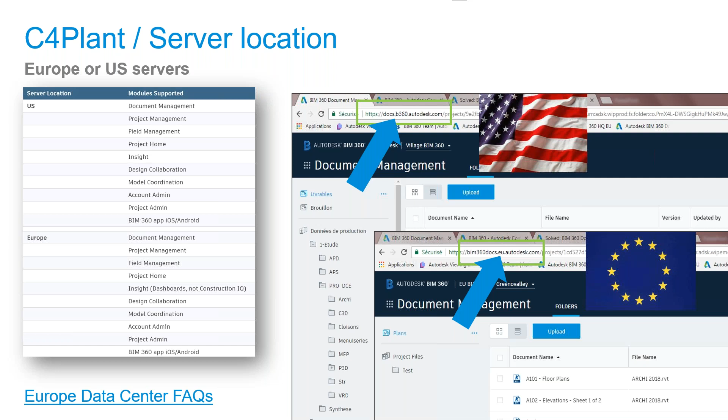Alternatively, of course, we continue using the US ones. And quite honestly, I've had people doing projects right around the world on the US server and have had very little problems. So just be aware of that.

I also wanted to take a beat to touch on the collaboration for Plant 3D access. We've had a lot of questions about this, and I'm also going to publish these slides to the blog in the next couple of days, hopefully. But just touch on it. So talking about single user subscriber licenses.

If you're a subscriber and you're trying to use collaboration for Plant, there's a few gates you need to get through, kind of that Swiss cheese effect. And if they don't all line up, it can be a little bit difficult.

First one, of course, is needing to get access or be licensed for the Plant 3D application. In the subscriber world, that is done through Autodesk account. When you launch the project, the product will ask you to sign in or identify your product, depending on how you've bought it. Autodesk account will validate that you have the correct license to use Plant 3D, allowing you to do that.

It will not actually give you access to the collaboration feature, even though it's installed with the product. When you click on that, it will tell you you may not have the access rights.

To get access to the collaboration feature, you also need BIM 360 design. When you do that, it will show up in Autodesk account, and in the subscriber world it checks that through your profile. That will then give you access to the BIM 360 suite of tools that are assigned under design, and there are a few there as well.

You can use Desktop Connector to access the project, and it gives you access to the doc space as well. But it's worth noting that Plant 3D is accessing a folder inside your BIM 360 docs folder structure. So docs is entitled under BIM 360 design for the purpose of collaboration. You need to have permissions to see and download the files in that folder.

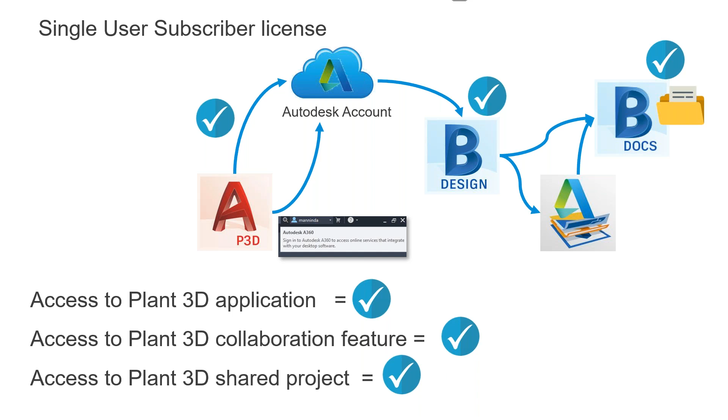In the multi-user environment, it is often slightly different, and we're talking here about using server-based licensing. It uses a network license server to issue licenses to users. The real difference is this first step where we log into the WAN, LAN, or VPN for our enterprise, and when we start Plant 3D, the first time you launch it, it gets licensed, or it's done as part of the deployment, to the license server that you're required to access.

That gives you the ability to use the application. And then when you try to use the collaboration feature, it's going to want to go out and validate that with Autodesk account. So there's two separate systems there: the corporate license and the Autodesk account, which does go back to your corporate license, but it is entitled through your Autodesk profile.

Now, you may not have done it to start with, but at this point, you'll be asked to sign in. Again, top right-hand corner of the product, you'll see a sign into Autodesk services.

Once you've done that, and assuming you've got BIM 360 design entitled to you by someone, you can utilize that entitlement to access BIM 360 design. And finally, as long as you've got access to the project folder so Plant 3D can find that project XML, you will have access to your collaboration projects and can work without any problems.

What is better, Revit or Plant 3D? In all honesty, there's a bit of a hook there. Neither is better. They're certainly better in their own ways and for certain things, as in they both have strengths, and they both are better in some use cases, but neither is better than each other. They both have their place in the world. It really depends on where you sit and your perspective of those use cases.

So we thought we'd take a look at it in a direct comparison structure first. This is a Plant community meetup, so I know you're all very familiar with Plant 3D, but we thought we'd set the stage a little bit and look at what we've called the Plant 3D spine, where we start at the top left-hand corner with the specs and catalogs editor, where we can edit our components and build out our specs, which is ultimately the backbone of the Plant 3D environment being spec-driven. That then drives value through to the P&ID and the Plant 3D space by using those specs.

Of course, you don't need to use them for P&IDs, but it does increase the value there. And there's plenty of other tools that go on to add value and speed and quality and efficiency. So we can use those specs in P&ID and in the 3D modeling environment.

Of course, where some huge value comes into the P&ID environment is generating reports, and in fact that's generally - you can see the two blue arrows going from the modeling environment and the P&IDs back to the reporting section - taking reporting from spreadsheets and notes and books on the shelf, as I vaguely remember keeping ISO drawing numbers in logs, down to single-click buttons that can be updated at the drop of a hat, and they're 100% accurate with what's in the system. It just eliminates human error and makes things a lot faster. Huge savings there, as well as accuracy.

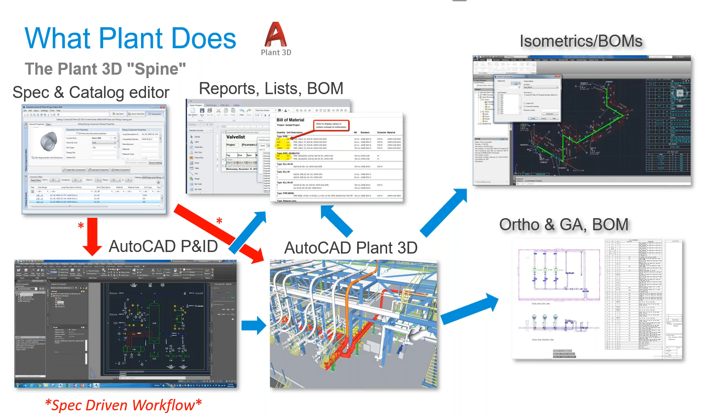In a lot of similar ways, when we take a pause over to the Revit side, we look at the same sort of structure. Revit is still a file-based database - a file is a database, effectively. And we start at the top right-hand side with the Revit master model. You can get, again, reporting coming out to the left-hand side of that. It does use parametric families where we're using objects in Plant 3D. We're using families here, so there's a lot of similarities there, but there's pros and cons to both styles as well.

The 2021 version of Revit has a generative design feature, allowing you to use Dynamo and other features to analyze the design, to test various iterations - a significant thing, a whole class on that, so we can't spend too much time there, but it is being built out and will continue to be built out. And the last point on the left addresses three main areas. So when we're talking about buildings or structures, it even goes beyond just buildings.

So Revit is not just for buildings; it goes into a lot of things, but its history is founded in building design. We talk about three main areas: the architectural model, which is the physical structure, the building itself, the fascias, the walls, the fittings. Then we also talk about the structural model, which can be just a structure. You could build a shed with it.

I'm sure people do. But it's the structural design, the members, similar to what we would do in Plant 3D with the structural module, only significantly more detailed. And there's definitely a parallel there to the Advance Steel, which we'll touch on in a bit.

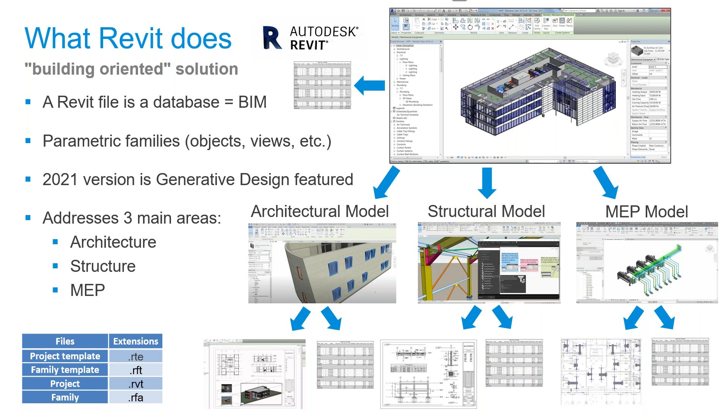Just to look at Revit in the Plant 3D project environment, where Revit will particularly help is where Revit can help a plant project. Plant doesn't do structures very well. It doesn't do buildings very well. Sure, we can do buildings in there, but it's not what Plant's designed to do. Plant is designed to get that piping stuff done as quickly and as efficiently as possible, and at fabrication accurately.

So Revit can come in and be really helpful with the building elements and the overall structures that complement. And the top image there, of course, is a plant that is inside a shed or a building, is a classic example. It might be a great way to collaborate with the team rather than trying to revert to some less efficient ways to do that structure. And there are obviously workflows between the two with structures too.

Now, concrete design is where Revit is really good. It also has the formwork and the rebar built in, where that gets fully detailed and comes out in drawings and fabrication details. Honestly, I haven't done much with that, and I don't really understand it, but I understand it is really powerful and interesting, and certainly worth keeping an eye on.

Sorry, I just thought I saw a question come through. Not just yet, so that's good. I'm just going to delete that one.

Leave that one there. And of course, talked about before about cable trays, your HVAC systems and general ducting, which is also a powerhouse of the Revit side. We don't tend to do that too much in Plant 3D, although of course you can. It's just where Revit really comes into its own.

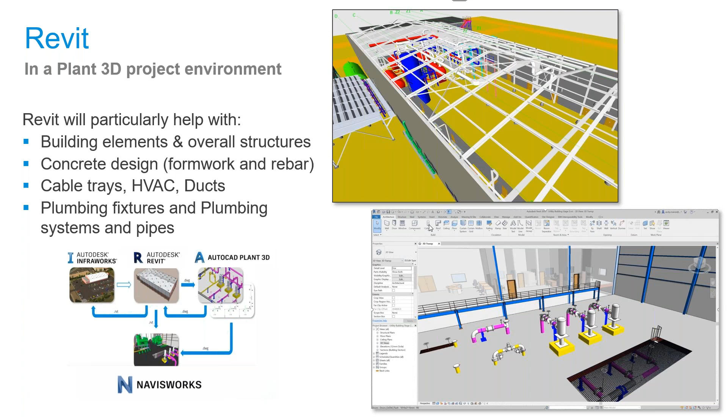We can do highly accurate, highly complicated, if you want to go that path, clash detection and a whole bunch of things. But I think I might be getting a bit ahead of myself. So it all does become integrated together.

Now, we just thought we'd take a quick pause. There are products that we have that work well with Revit and with Plant 3D, and reality capture is a big part of that, and we tend to see a lot of people starting to embrace this more. The prices in the last 10 years of getting a scan done has come down so far. It's becoming really accessible, almost to the domestic level, and you can do it well. In fact, it is the domestic level, because you can do it with your iPhone these days, or whatever phone or camera you've got, and use the photo to mesh, although that's not going to give you scale. But if you've got a tape measure, you can certainly fix that as well.

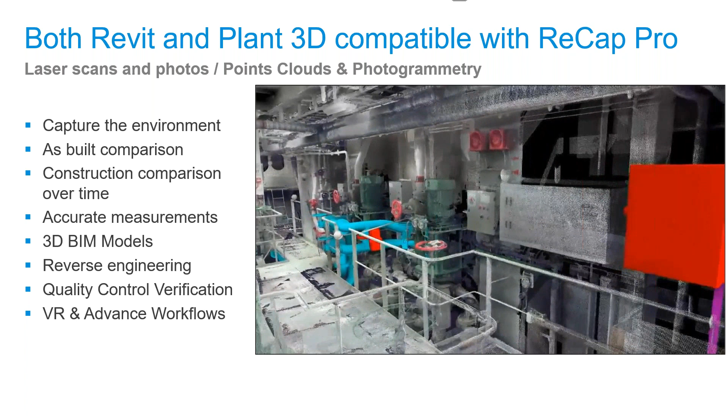This is a video, I'm going to see how that plays and we'll see what happens. So this is just a little video. With the world these days and the scanners, you can get some now that are so cheap that they're so easy to use. They're literally a single push of a button. You can run down to a site and grab all this sort of scanning.

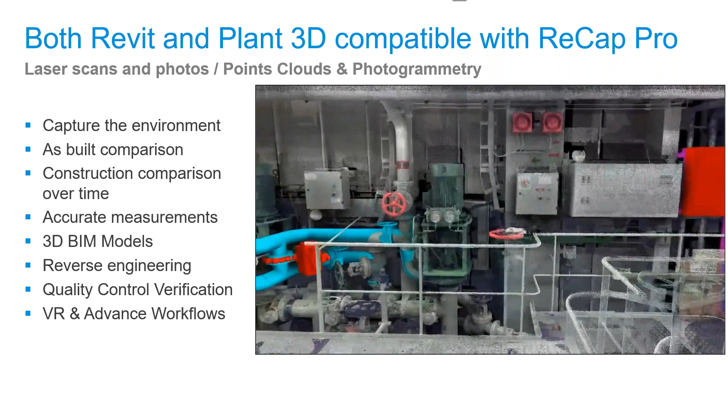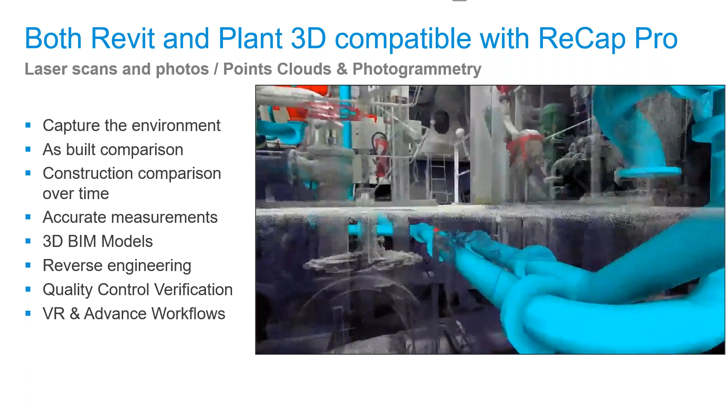The huge advantage, of course, is to get this level of detail that you're seeing on the screen would be just weeks and weeks of tape measure and sketching to be able to get, and you still never get exactly the right measurement. Each one of those dots you're seeing is a laser measurement, which is just indispensable in the design environment once you're used to it.

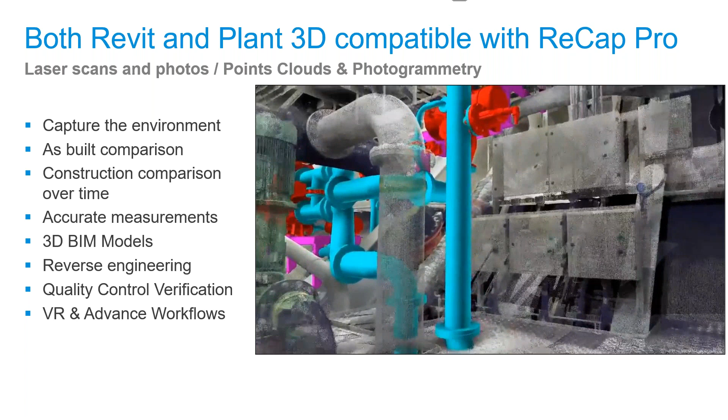What we're showing is it doesn't matter whether it's plant piping or Revit piping, it could be the same thing, but it gives you the ability to route that piping in with the existing environment in place. And that's looking like a ship, actually. Just look at that side there. So really, really powerful tool.

For reverse engineering, for building out your 3D models, getting that accurate measurement exactly where you need it. And I've certainly seen that become highly valuable to a number of our clients. And like I said, with the cost of everything coming down, it becomes one of those things that just becomes day-to-day.

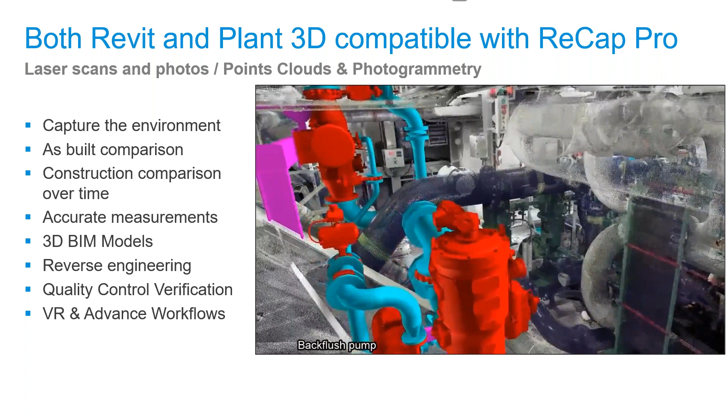Experiences. How much left is on that? I might pause that there. I'm not seeing any questions on reality capture coming through, so I will keep moving on.

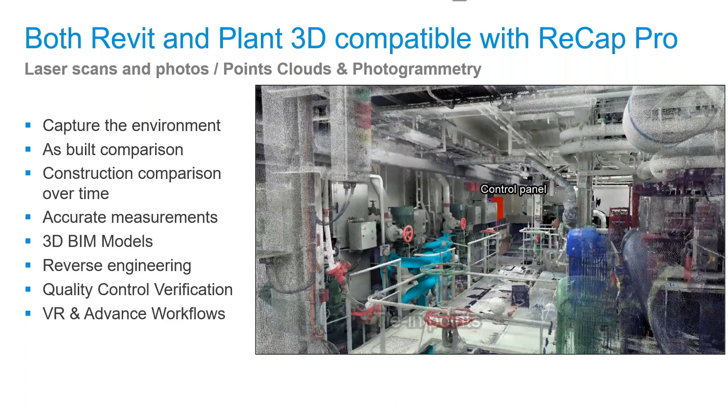So the next thing we want to look at is, so when you're talking about both products and comparing the features as well, both are now also storable on BIM 360 docs, which sort of changes the dynamic a little bit.

As you're probably aware, 2018 to 2020, Plant 3D was in the BIM 360 Teams environment, and that was the same as Revit for a period of time, but none of our other products were in there. Now that we're in 2021, if you're using that, you can access the collaboration feature for Plant in the Docs environment, which means that we are now working in the same project or same cloud storage space as our Civil 3D colleagues, our Revit colleagues.

We can also share any other DWG up there with specific knowledge on the workflows. And there are also workflows to leverage things like the BIM 360 coordination space to be able to do automated clash detection and issue management. And Docs adds in a whole bunch of advanced features, the absolute best of which is the permissions, allowing you to control whoever has access to what.

But we covered a lot of that last month, so I won't go over it too much. Just worth noting here that Revit, when it started doing a collaboration feature or the work sharing feature, did start in the BIM 360 Teams environment, and that is accessible or still currently usable all the way up to Revit 2018.3.

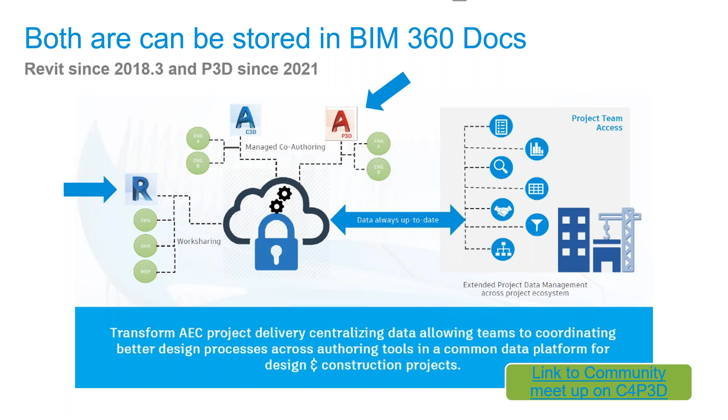And I will show you the page in a bit. The other side of that is to just highlight the point that Revit and Plant 3D are not two separate products that are completely disparate. They do work together, and one of the great examples of that is the P&ID connector for Revit.

If you haven't heard about this before, it is basically a P&ID drawn in Plant 3D that is made accessible to the 3D modeling side of Revit MEP.

The way that basically works is it's a collaboration project for Plant, and that can be, again, version dependent, whether you're in BIM 360 Teams or BIM 360 Docs. You share that project to the cloud, you detail your P&IDs as you normally would in Plant 3D, and a Revit designer, who is, if you're going to do the piping in Revit, can access that P&ID.

In very, very simplistic terms, selecting the drawing from the browser. Once that opens, you can select the pipeline and then individually select the pipe or a valve and drop that into your Revit model, taking some of the properties with it.

Now, there is a bit of a caveat there that for that to all function, there is a mapping, similar to why we map P&IDs into the 3D environment, but it's obviously less intuitive because it's a completely different product. So there's a bunch of mapping that needs to happen to get that to function.

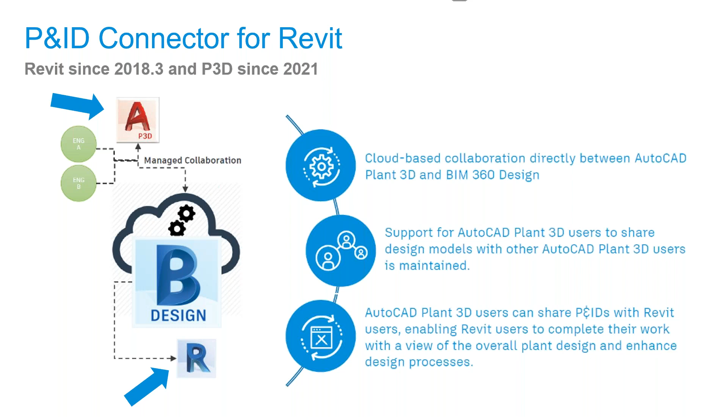So that brings us to what tool is it that you want to use? What tool is the best in what circumstance? So let's just take a beat from something we were discussing last year internally, and now I've had permission to share this slide from some internal teams.

What we're looking at here is the types of projects that are used across the industries, typically serviced by Revit MEP - that's the ducting, the piping side of it, mechanical tools - and in the top right-hand corner you're seeing the Plant 3D industry. Now, looking at those, it might be a bit hard to read on your screen, but the bottom right-hand corner are the colors of the dots we're showing. So the dots are project types, and the colors indicate what kind of piping systems they're talking about.

So let's start at the bottom left corner. We're looking at educational institutions, hospitals, commercial buildings, industrial facilities that are non-process type things, civil infrastructure there in the middle. And as you go across into the Plant 3D side, you can see there's deliberately an overlap in the middle.

And what we're looking at is these medium pressure processes, the green ones being low pressure and the red being typically high pressure, as a generalization.

So the blue ones, as we go through, the medium pressure, we're again looking at wastewater systems, water and wastewater systems, potentially semiconductors, food and beverage facilities, industrial facilities again, but looking at the process side of that, marine, so talking about shipbuilding and ship design, moving further across pharmaceuticals and biotech, mining and minerals processing, and pulp and paper, all in that sort of medium pressure space, because they're not dealing with really high, really hazardous materials.

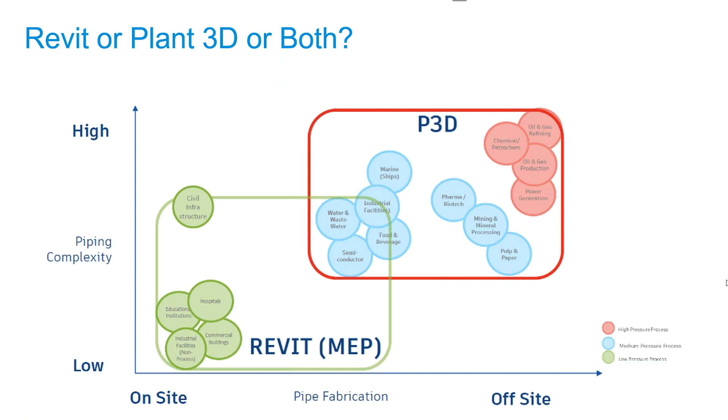So just keep in mind, the line through the middle for me is the field fit or not field fit stuff, but don't take this as a rule. It is just something we're looking at as an organization to try and look at where we're developing and where the development of things might go in the future. No promises, I'm not suggesting it's definitely going away. It's just how we're bucketing things for the time being. Subject to change as always.

So, pros and cons of each, why they add value. For us, when we're talking about this, if you come to me and say, I want to know whether I should be using Revit or Plant, I want to talk to you about which one's going to give you the best value. They're both Autodesk products. For me, it's about what's going to help you succeed in your business, in your project, and which one is going to do that the best way.

So let's look at the Plant side of things. Again, I know you're very much involved in these already, and you don't need to labour the point. So we're going to put a couple of things in here just to offset the Revit side for those who are a little bit less familiar.

This is where Plant's really going to add value. Obviously there's all sorts of things in here we haven't mentioned, dozens and dozens of features and functionality, but at a top level, the first thing that comes to mind is spec-driven design. Revit's not doing spec-driven, it's very simple. We've also got the P&IDs in there as a tool. Both can do them, but that spec-driven validation and intelligence that comes into that P&ID and the general spec-driven design is where you see huge value coming out of the Plant 3D environment.

I've also called it quick, intelligent P&ID drafting. We say that because it is generally very quick, using those smarts and intelligent design tools to make everything a little more efficient. Industry standard symbol libraries come with it, and of course you can build your own - it's the fastest one I've seen to create custom symbols. P&ID validation tools add on top to make sure things are correct, simple things like the shaders, or painters rather. And P&IDs can be used to support Revit pipe modeling, so it's not just standalone, it's adding value to the project.

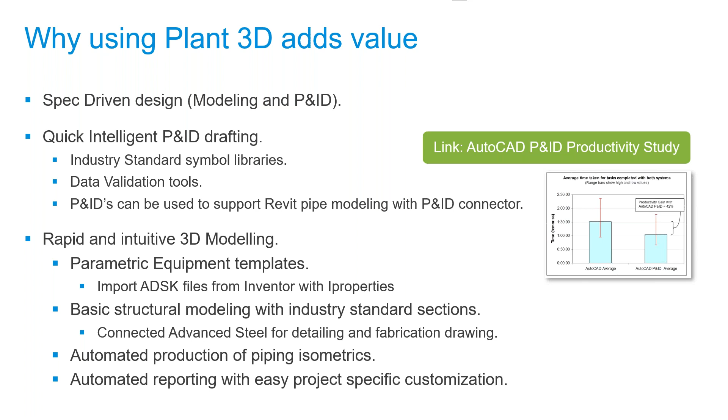Yes, P&ID connector is in Revit. Let me come back to that because I think we're going to touch on it in a minute.

Okay, so looking at Revit, why it adds value. It's considered an integrated parametric BIM solution with computational and generative design tools - that's a mouthful, a very wordy slide. We can use Dynamo Player, our tool for scripting using a window or block-based programmatic tool. That is now being able to leverage that coupled with Revit and Dynamo to do generative design in the latest version, allowing them to iterate, test out multiple versions, and see which ones meet the requirements best with a generative design function.

It's minimizing the time-consuming tasks during design detailing analysis. There's some really interesting features we'll touch on the analysis side. Analysis features for sustainable design codes for MEP and structure, including parametric content for architecture and structural MEP, and customizable embedded macros. We will come back to the analysis thing in a couple of slides. I want to focus on that because a lot of people don't know about it.

And the BIM 360 platform interoperability. If you're using BIM 360 design with Revit, there is a whole back end to the BIM 360 design feature, or module, that Revit leverages or is built out for, with regards to publishing and sharing of files at various stages into the BIM 360 project. If you're interested in that, please reach out to us. There is a whole suite of tools and accelerators we can talk about to share with you.

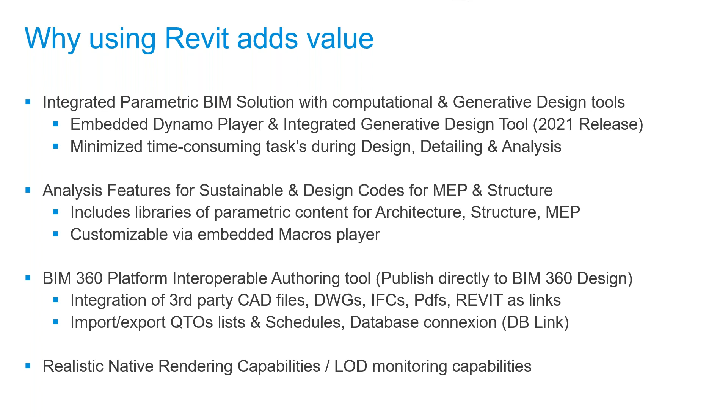Certainly, it's a comprehensive and complicated module to meet the needs of a very large industry. And of course, we can do realistic native rendering capabilities within the Revit environment and level of detail monitoring as well. That can also leverage cloud services, and there's a bunch of things we can do there within the Revit side. A lot going on there.

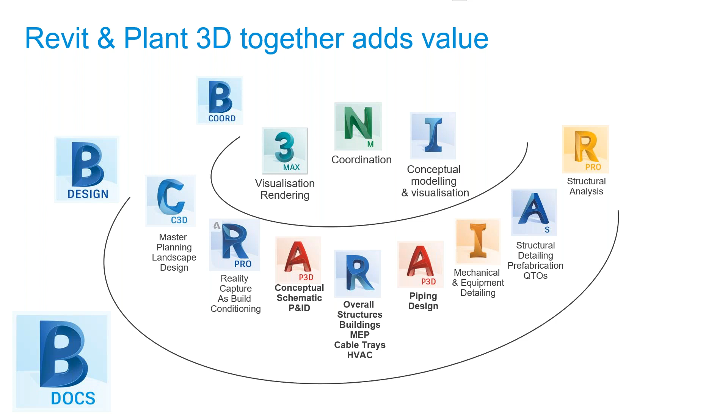So the logical next step, of course, is just having a look at - so we've talked about two products independently working on projects. I've referred to it numerous times. They are not necessarily independent and they can work together. So we just did a quick brainstorm and had a look at, if you were doing a fully comprehensive project, what tools you might use for various parts of the project.

Really straightforward, in some ways because of the simplicity of it - you might just do a conceptual design layout in Revit, and then export that out for the buildings or the structures. You might even import a Plant 3D bit of piping if you just want to do it really quickly, and you can export or import that into InfraWorks for a visualization to give your tender or early stage designs some real meat, some real visualization capability.

Of course, in a plant design, the next step is the P&IDs. Obviously, in the ideal environment, they would be finished before the piping starts, but that's never the practical reality. So we talk about that has to be in Plant 3D, in my mind at least, and you can do them in Revit, but for value, you want to use Plant 3D.

Equipment detailing, tanks and pumps - while we can put them in Plant 3D, I would encourage you to use those as placeholders. There's certainly, if you're going to do details of those, you actually want fabrication drawings for a pump or a tank. Then Inventor's the tool for that, and Inventor and Fusion 360 to some degree, to do all your equipment modeling. That can then export an ADSK file, which can be re-imported into Plant 3D with all the intelligence, connecting the two workflows. In the same way, you can do structural in Plant 3D, and it's often a great way to start it - just lay out some pipes and sections so you can do your piping in context.

Revit MEP, I just wanted to show you this. There's some interesting features in there around the analytics side. The MEP fabrication extension integration, that's a lot of words, allows you to do a bunch of bits and pieces with Revit on the ducting side and do all that MEP bits and pieces.

The one that interests me quite personally is the pipe flow units. So you can see on the right-hand side, there's some basic plumbing done in the Revit model, and with some relatively basic inputs, the software can run some analytics, giving you pressures and flows and some basic data on that piping, which is quite interesting. Something I think would be awesome to have in Plant 3D, but not there today. So that's where it comes into its own.

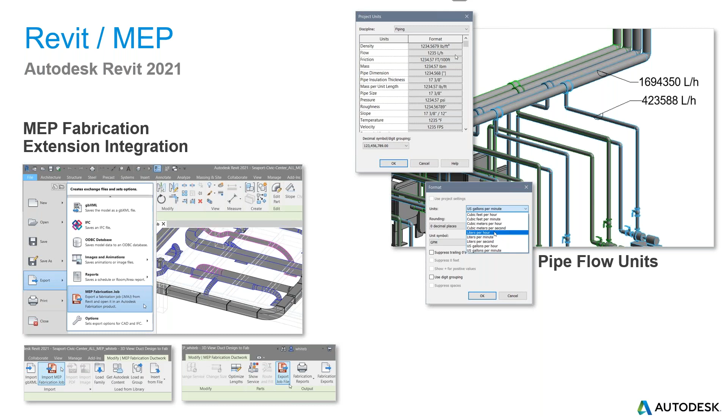We talked before about systems analysis or the generative design side. This was sort of the start to that, looking at the MEP systems analysis. You can do a whole bunch of work here, creating analytical geometry from the models, validate your models, and then review the analysis of the flows and the ducts and make sure everything works. Looking at your energy consumption, you can do solar analysis. There's a lot you can do here, depending how far you want to push it.

And extend that into the equipment zone and plant loop types as well. So there's quite a lot of detail there. A big link across the bottom if you're after that.

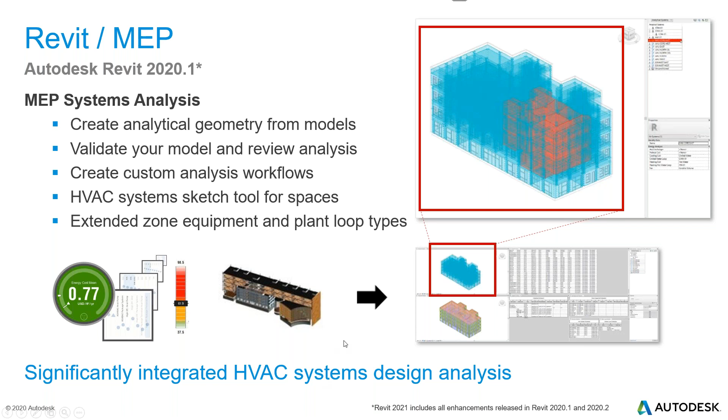Click to go to next. And so there was a question in the Q&A panel: is it the P&ID connector in Revit? So this is the slide I was waiting for to answer that. Yes, it absolutely is, it is in Revit. I couldn't tell you exactly which versions it came and left from, it has changed. I think it's 2016 to 2018.3 is the Team ones, I think it works for. Certainly it is in Revit 2021, and that connects to your Plant 3D 2021 projects in BIM 360 docs.

So just reading that slide out loud, it tells me that the P&ID modeler is now available in BIM 360 docs, and I'd suggest that's with 2021 because the plant projects are now there, and it replaces the functionality we have with Team. So there's that dual connection, and it's dependent on where your plant project is shared, and you need to make sure the right version of Revit is being used.

The way it works is very simple. When you're in Revit, there's a tool in the ribbon somewhere - you click on it and get this open dialog at the top, where you pick the plant project you want to connect to, and then you select from the new panel that opens up. You can see on the right side of the window the line and the P&ID you're interested in. Clicking on that opens it up, you've got P1005 there, and when you click on that, it expands all these.

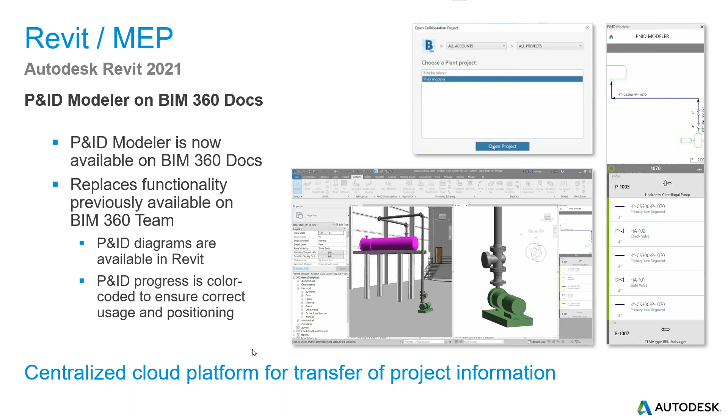So Navisworks adds value as well. Don't forget we've got all these tools trying to build out a holistic project for you, and Navisworks is one of those. Going into Navisworks still has advantages over BIM360 coordination. While coordination is a great space, really powerful, it still doesn't do certain things - you still can't do a quantity takeoff in BIM360 coordination. While you can do clash detection, it's all automated, so there's limited functionality if you can't manipulate it. If you want to manipulate it to change the accuracy or do some roughing clashes, then you can do them much more easily in Navisworks.

You can implement 5D visualization, which is scheduling of construction using Timeliner. You get your construction schedule, bring that in from Excel or whatever format it's coming from, or project management, and schedule the construction. Then you can run that as a visualization to see how things are going, making sure you've got no clashes through across time. You can also import project management databases from MS Project or Primavera, so you're not having to build it out from scratch - all that timeline stuff can be connected, you just need to bring it back in and it should update. Some really powerful functions there - don't overlook Navisworks, it's a really good tool even though it's been around for a while. That just means it's mature and well developed.

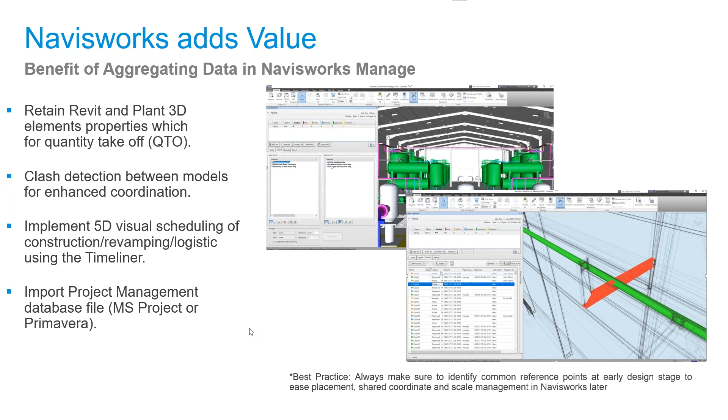All right, so we've been through a lot of data there. I think I answered all the questions, I touched on the IFC one. Vinod, good man - modeler was available from 2018, but not a lot of change. Yes, okay, so there's a comment in there about the modeler. Mate, if you could find something about the IFC, that would be great. So what's next? Let's just take a pause and check for any questions as we're going.